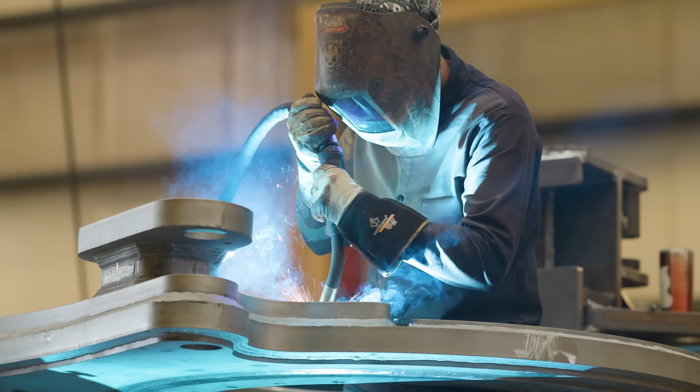Hearing that quote from Gary, that's what we live every day here. That's just who we are. So I think every part of it really resonates with what's instilled within us as we work through all the challenges. It's just who Vermeer is.

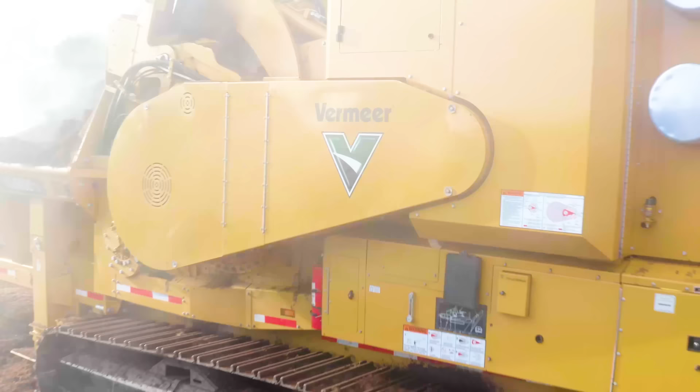We could have followed, but our goal was to be the best. I know the blood, sweat, and tears that went into all that. You know, when I see a Vermeer grinder along the road today, that's awesome.

Well, if you go back to like the 80s, for instance, which would be a little bit prior to when we got into tub grinders, regulations started coming onto the market about open burning of wood waste and that kind of thing. And there wasn't a whole lot of options for processing or taking care of that waste outside of burning.

Before Vermeer got into the grinding business, a lot of this wood waste and organic waste was simply being buried in landfills, and we realized that that is not sustainable. Our landfills are filling up and the life of those are being limited, and there's useful outlets if properly recycled to do that.

When this processing started, some of the early processing machines were hay tubs that weren't really built for those kind of wood waste applications. And Vermeer, just being entrepreneurial, looking at a better way of solving this issue, thought that bringing a more industrial grade tub grinder to the market to go after this wood waste would be an opportunity for Vermeer.

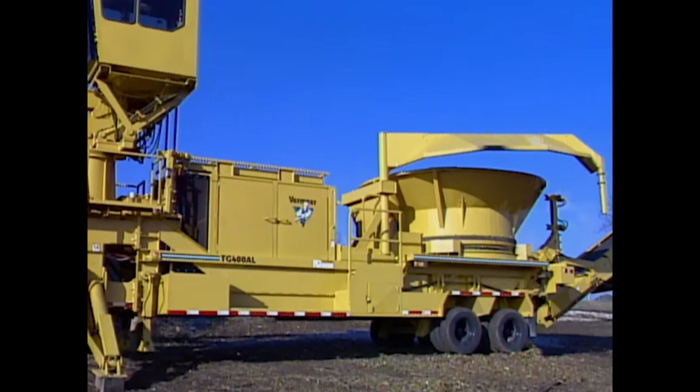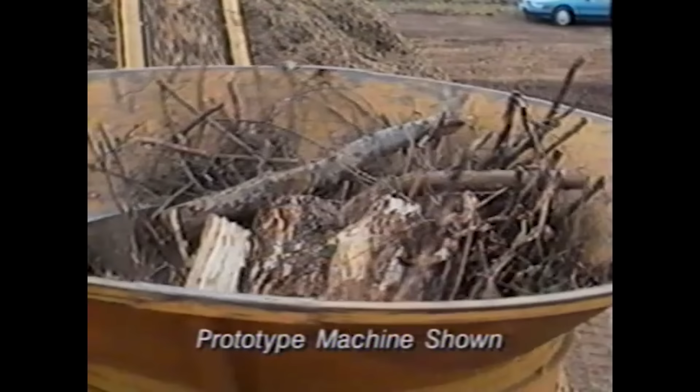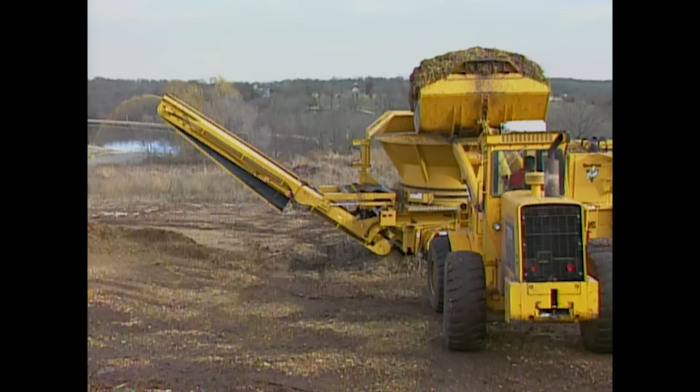Our first tub grinder on the market was a TG400. It's not a very large tub, but it went to the market and was very productive for its size. There was a lot of learning and a lot of development, and I think it's interesting to note that it started out with the mill, which is really the heart of a grinder, based off of a hay tub with swinging hammers that wouldn't take very big product, and so we developed a version of a swinging hammer with a larger hammer, but then it wouldn't penetrate wood.

So we used trencher conical teeth to penetrate. But it would kind of destroy itself, so there was a lot of challenges there. And so we developed a fixed hammer pin and plate mill. And then eventually what came out of that, because of trying to improve on maintenance and life and that kind of thing, was our duplex drum.

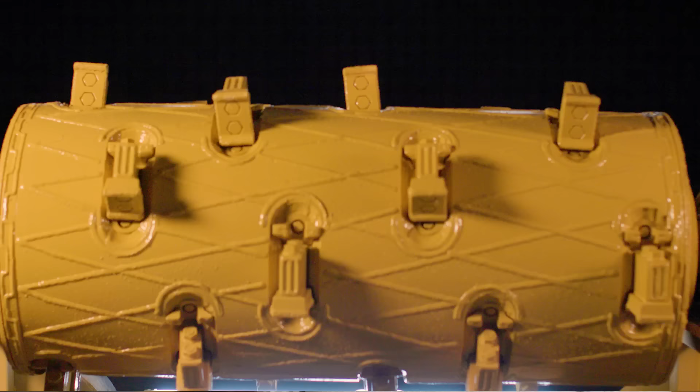So we'd been in tubs for a while, and there was some market opportunity to go into horizontal grinders. Horizontal grinders, just like the tub grinders before that, we learned so much with that first machine of not only what went right, but a lot of what went wrong. There was a group of us that were tasked to build a mule prototype horizontal grinder. And we had 6 weeks to build the prototype. And we all looked at each other like, that's great.

Honestly, we put together a group of folks and we built that prototype, we started it in 6 weeks and took it out. Fun fact on that is we took it out behind the plants to grind some pallets and broke it in 5 minutes. So thus the learning began about horizontal grinding. It was a lot of heartache.

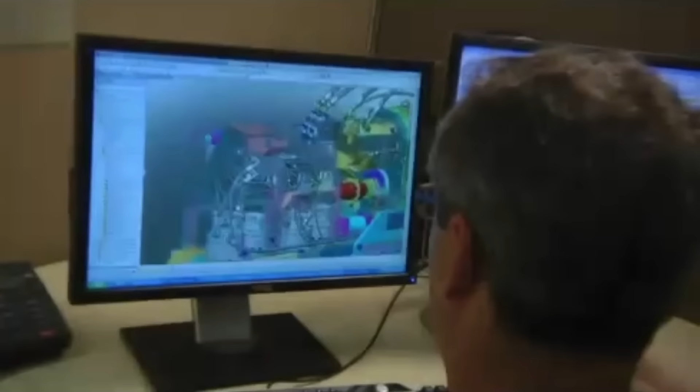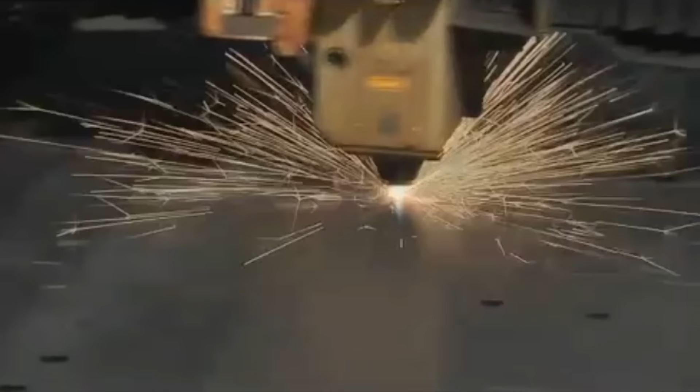We tried things, we used high-speed cameras to capture how the wood shattered. We really went to the next level to truly try to solve the problem. And seeing these guys come back at the end of the day shaking their head, and we're like, nope, that didn't work. At some point it just clicked, and we changed a few things in the geometries and locations, and it was just like, wow, that works.

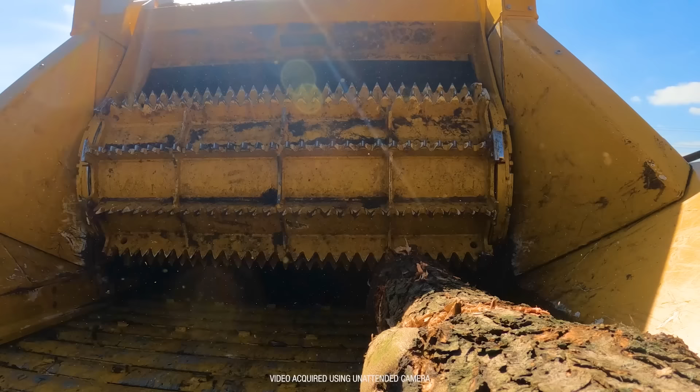They went through a lot of heartaches, a lot of sweat and tears to get that to work. It was that difficult a problem to solve. There's DNA of the HG525 in all of our horizontal grinders that we build today.

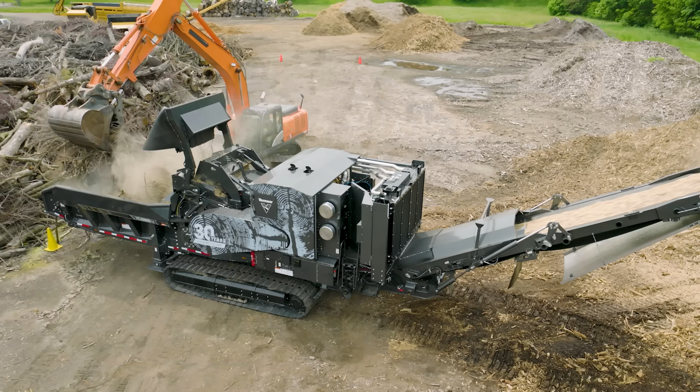When I think back to the history of grinders at Vermeer, the machine you see behind us, it's that pinnacle, it's all those things we've learned over the years. It's getting to that level where it is a market leader. It just didn't get much better than that.